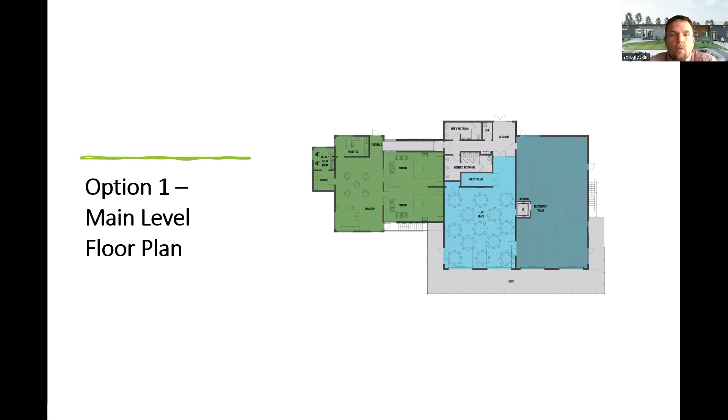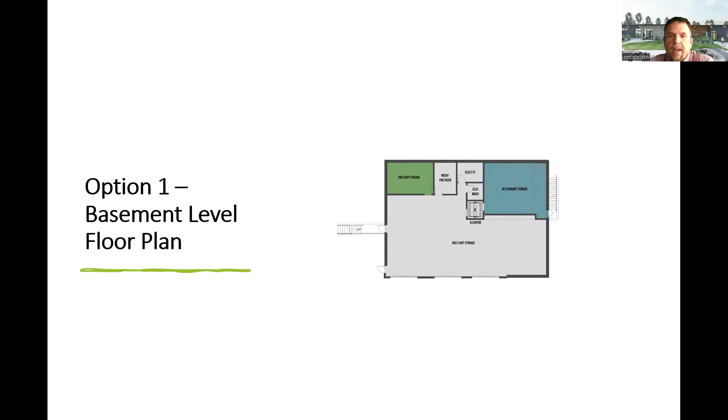We also have the deck area that we've talked about and really designed to. Next slide, Carly. Within the basement level, this was kind of that reuse of the existing footprint. So we have cart storage, pro shop storage, and there is some restaurant storage included as well. Then you have your back of house: mechanical, electrical, and fire riser room, kind of back of house spaces.

That need to be included in order for your building to operate. And then from an exterior perspective, we've really stayed true to the exterior renderings that you've seen previously, as far as having three different elements.

I'm not going to speak to the architectural nature of this project. Steve and Joey and Architects West have done a great job of doing that previously, and that's not my area of expertise, but I just wanted to highlight that we've tried to stay true to those core concepts that you've seen. So that was previously the front of the building.

And then here's two shots, one looking from the south, kind of looking southwest, and then southeast, to give you a flavor for that back area of the building itself.

So I guess the takeaway before I move on to option two is really, from an overall functionality and concept of what you've seen, we aligned that budget with the scope we've presented on previously over the last four months. We want to make sure we hear what you've previously talked to us about, which is the budget, and that we have a scope and project that still aligns with the budget we've been given.

There are some concessions that we've taken into account to realign and get back to the budget of $6,995,000. I wanted to highlight what those elements really would be. So what you see here is a reduced scope, impacts are in red. The first is really a function of operations for the golf.

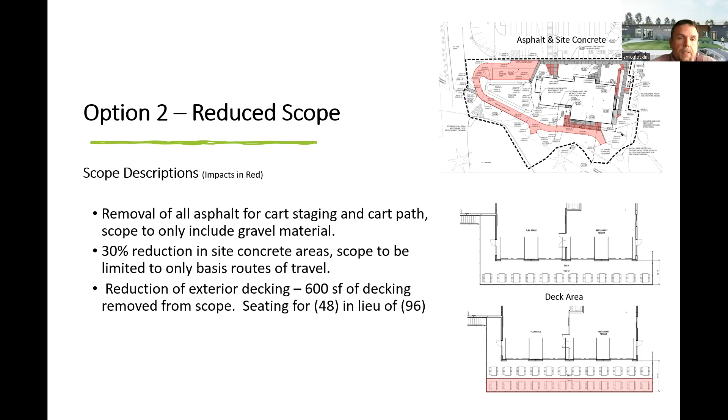On the interior of the building, there's some changes we would make. The first being the reduction in all casework areas, so we would have a very minimal allowance to include casework, mostly impacting the pro shop.

The areas in red give Chris only a break room area and a point of sale countertop, with auxiliary areas eliminated, as well as eliminating casework down in the cart storage area. There would be no casework other than a point of sale countertop, the countertops associated with the restrooms, which are required, and a break room top in his break area.

The other thing we would do and save for a later date is the separation of the pro shop from the sim bays. There's a vertical wall with a clear line of separation that includes the doors and windows. That would become one big open space, not separated, in order to decrease costs on the project.

At the exterior, there would be a reduction in the amount of exterior manufactured stone. We'd be very isolated in how much stone you see. The change would be a fiber cement exterior siding condition in most areas, with a minimal amount of that stone feature focused around the entry to the flex space. The other elements of the project would be fiber cement siding materials.

I really don't want to add any more to how much we're going to spend, but I do like the possibility of taking the 300,000 out of the golf operations, provided that that doesn't end up being something that comes back to bite us.

The amenities that you've presented to us, to me, gravel versus concrete being a lot of maintenance - I don't think any of us need a primer on that. It would be, and Lisa sort of handed off to you, but that could be an ADA issue in my opinion as well. Anybody who was going to be using that area, gravel versus concrete or asphalt, is just not even usable, let alone the increased maintenance.

Back to the building, while I don't really care a whole lot about the pro shop's trim boards or baseboards, can you speak a little more to the removal of the stone on the front? I'm assuming that's the parking lot side of the building. There's none on the sides. Just trying to understand where the 700 square feet would come from if that was the route we were going to go.

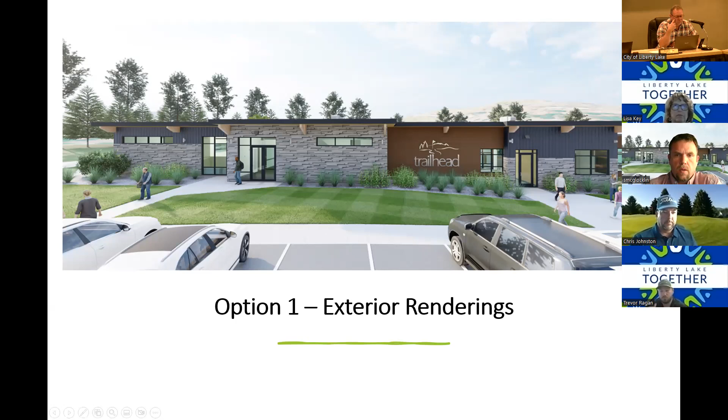Yeah, so the rendering we'd want, Carly, is with option 2. But to speak to the extent of it, really all you'd have at that point is what you're seeing in the lower right-hand corner, which is the entry into the flex space. On the backside, we could isolate a couple areas where we have some pillars coming off the deck to accent the material there, but really only 2 locations for that material, so that would be replaced.

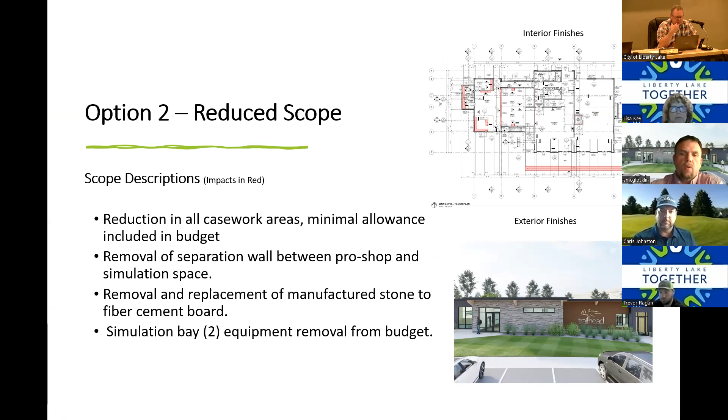So the previous was like a wainscot where it says 'trailhead' over on the far left. Correct, around there, and then the same occurs on the backside on the wainscot around the deck area. We would remove that and go to just a couple of vertical elements by the overhead coiling doors or sectional doors, just a couple here, nothing over on the side. Great, thank you. Yeah, and I would echo the 4%, just great.

Yeah, great. Councilmember Cargill. Thank you.

To Councilmember Foyers, I understand what you're saying about the 9 to 12 million we were talking about, but I want to remind everyone that we broke apart the driving range at that time, and we said let's not forget we still have the driving range. So if we add the driving range back in and all the other stuff that goes along with this, we're probably going to be in the range of 8 to 9 million right now. Again, we don't know what the driving range is going to be, and that's one of my concerns, because it could be a huge outstanding cost that we have no clue about at the moment.

Kyle, I just want to ask a few more questions about the golf fund balance. Where does the golf operations fund come from? So that comes from all of the revenue generated: greens fees, driving range fees, season passes, and pro shop merchandise. Those are your major revenue generators.

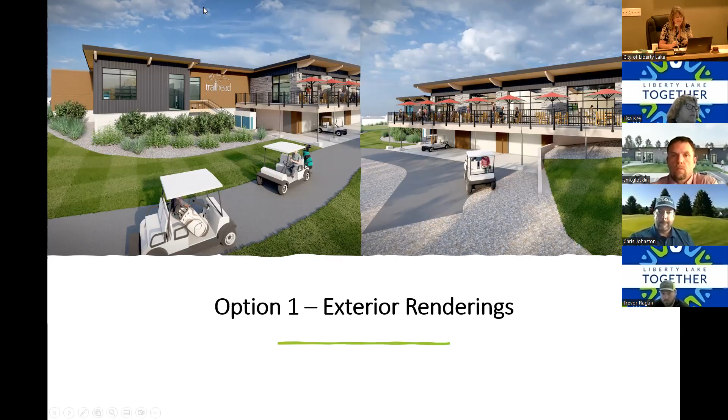Thank you. Any other comments? If not, we do have a section for more discussion during the workshop, and we've got the action item later in the meeting. So it's 6:46 - why don't we take a break until 7 o'clock and come back then. Thanks, team, we'll see you back for the action items.

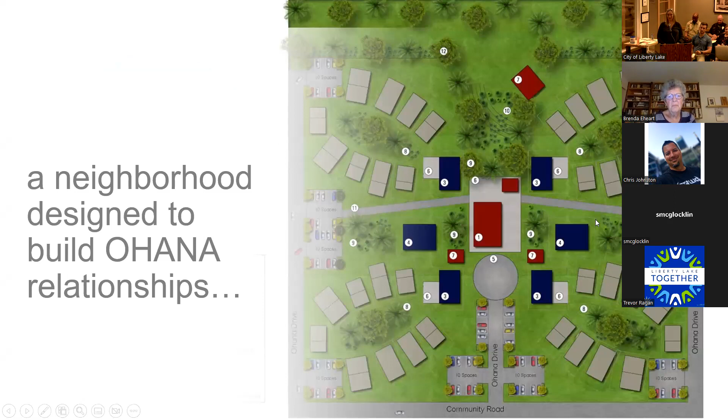So I know we're running out of time, but I just wanted to give you a visual of the concept we've been talking about here. The Ohana is a neighborhood conceived for a very specific purpose, as Deb mentioned, to support different people through the different life stages. It's very important to us that we follow a path of thoughtful and inclusive design for the homes in the neighborhood that follows that purpose.

While we haven't yet finalized our site location for this project, we've been thinking for many years about what this neighborhood might look like. We've been having community conversations with our Ohana community, both people who might live in this community and people interested in it, talking about what it might look like and how we might design homes and the site itself to accommodate the different needs of people who will be there.

Let me very briefly describe this concept. It's based on pocket neighborhoods, a concept coined by Ross Chapin, an architect here in Washington. The idea is that there are clusters of 7 to 8 homes, maybe up to 10. You see 4 clusters here. On this particular site plan, we would have about 50 homes in total.

Each cluster is designed so that the people who live in that small pocket neighborhood get to know each other really well as they walk on the paths to their front door, or work in the little community gardens in between the homes. Each cluster also embraces a home where adults with developmental disabilities might live—you see that in the center in those purple buildings. Each of the 4 clusters surrounds a common house, an extended living space where people can stop by for a cup of coffee and have conversations with their neighbors.

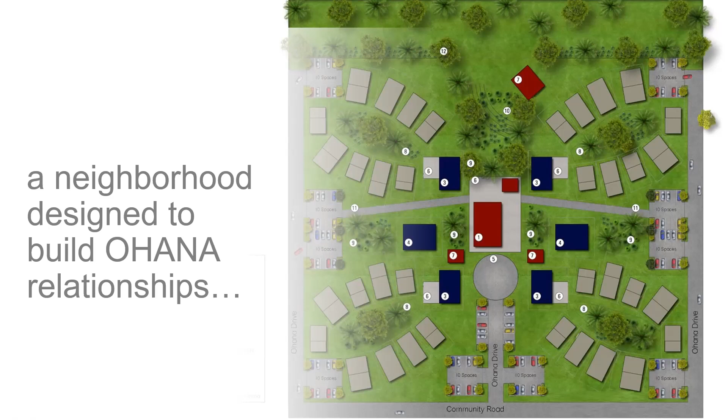The homes in Ohana will be single-family detached homes. We haven't yet designed them, so I'm showing just an example of what a home might look like in one of these clusters. The homes will be available for sale to anybody who wants to live in this community. We imagine a lot of the families of people living there with intellectual and developmental disabilities will be first on the list, along with seniors or retired people interested in living with this purpose we've defined.

It's very important to us that the outside of the homes look like any well-designed home, so they appeal to a range of buyers. They'll be very well-built, high quality. But if you look closely, you'll see even more careful attention paid to the design of these homes and the neighborhood as a whole as we move forward.

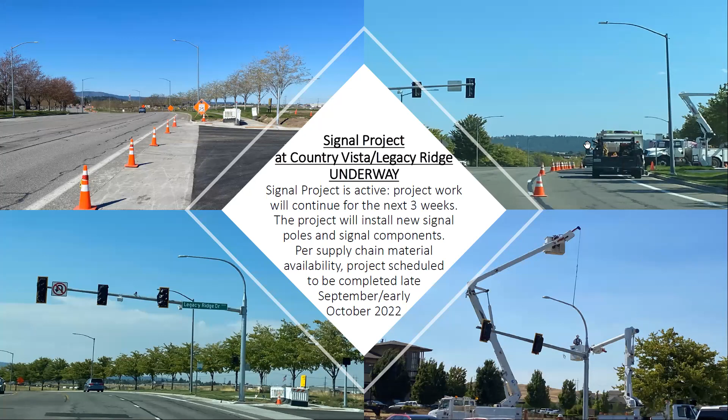The first project is the signal project at Country Vista Legacy Ridge. I received so many phone calls about this project, and now you see some photos of the work taking place. There are poles up right now, so we're moving on this job. It should be completed by early October 2022, so in just about a month or so.

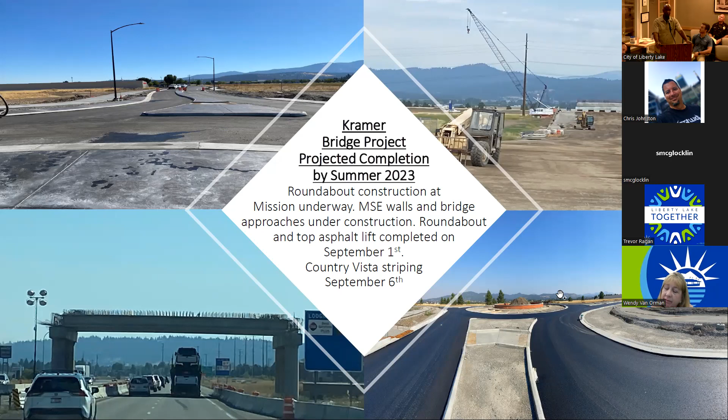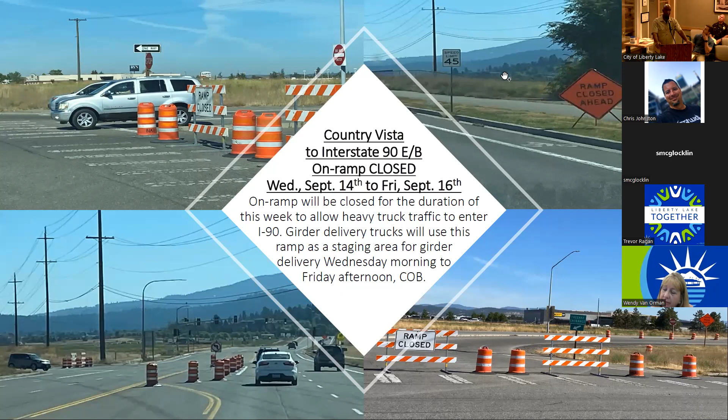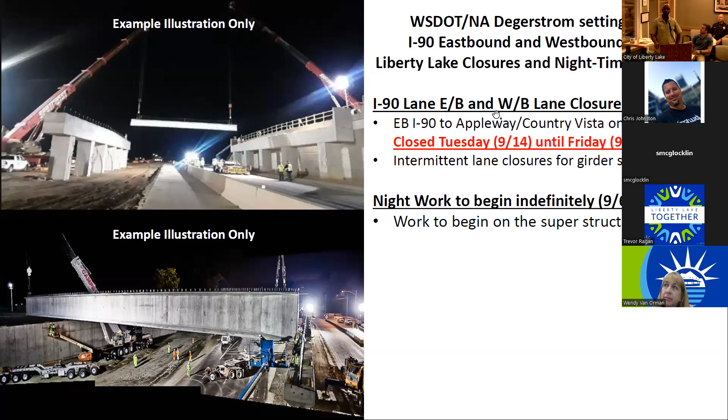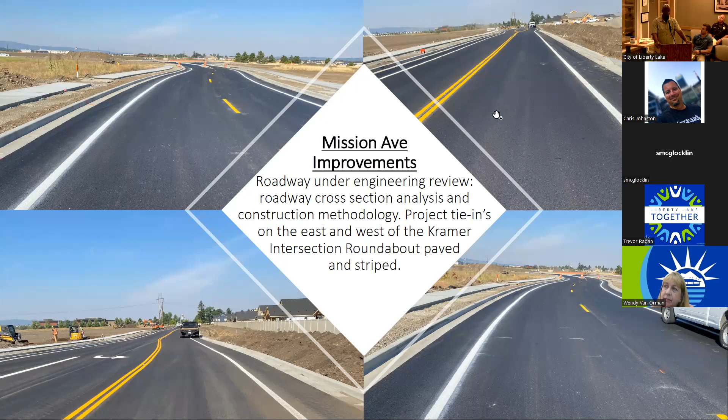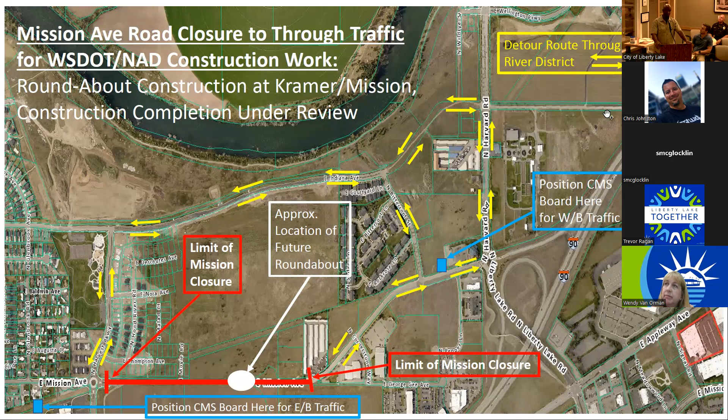This is, again, the detour route that we have going along from Harvard, then over to Indiana and to Harvest. As school is beginning, we're just asking people to please direct your children to use the detour. Please do not have your kids go through the construction zone. I want to thank Liberty Lake PD for patrolling that area.

We have residents who are actually driving through those areas right now, right down Mission. It is a closed roadway. We're asking you please not to do that because you might encounter construction equipment or construction stuff. So we just ask you to please stay off of that road until it's actually open, and one more time, please lead your kids to take the detour.

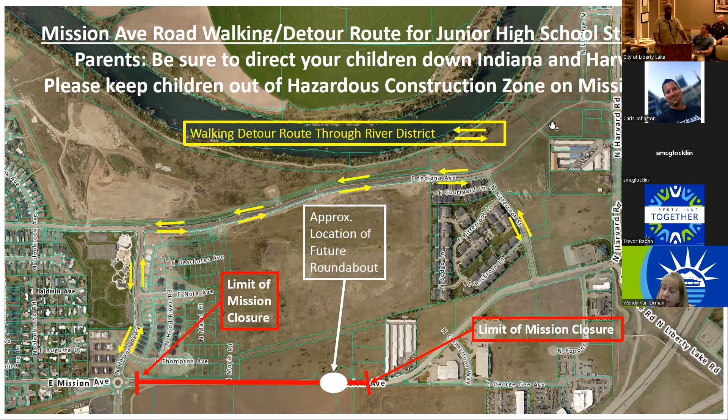This is the Kramer rehab project, and this is actually kind of a great end to this thing. We're coming up close to this actually being completed. The roadway has been paved for most of the road, about two-thirds, maybe three-quarters of it, are done. The section closest to Sprague, I think it's Legacy Springs, I think it is...

Trying to read that real fast. I realize that I'm 46 now, I can't read as far as I used to. This aging thing. So yeah, that road, that portion, the top right picture right there, it is still open right now.

Beginning today, they are doing a complete demo of that area going down to Sprague, which will take another 2 weeks or so. We're saying all the way up until September 21st, but we're trying to work diligently to get this portion of the roadway done. So please know, if you're coming out of Green Acres to take the roundabout over to Sprague and up to Appleway, residents living in Legacy Ridge can actually drive down Kramer all the way to Country Vista. So Legacy Ridge is pretty much open for traffic, and it's striped right now as well.

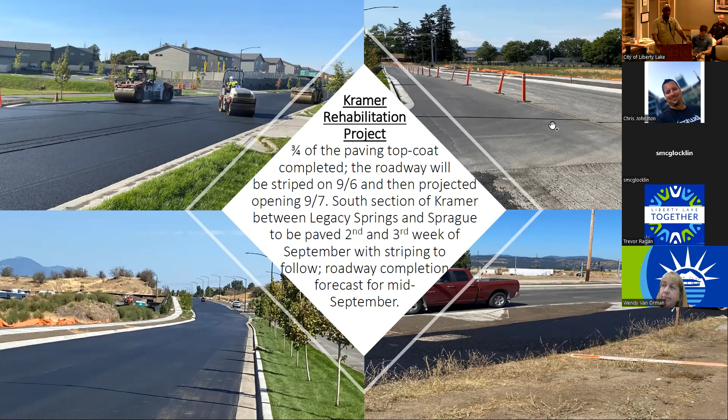The Kramer Parkway between Sprague and Legacy Springs - I forgot about this one. This is a 2-week hard closure, the same area I was just speaking about. You can see the photos here, this is what it looks like currently. We're again going through an engineering review to make sure it's rebuilt correctly and done appropriately. So just know, if you're coming out of Green Acres, this section of roadway will be closed for the next 2 weeks. That's our projected schedule. We are hoping and pushing this one through NA Degerstrom to get that done a little faster.

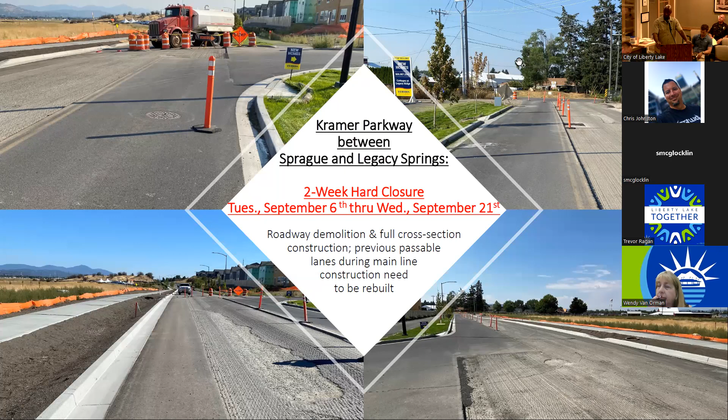Next slide please. You can see here, this is just an illustration of our layout showing the white area is Kramer, which is open. You can come off of Legacy Ridge onto Kramer and up to Country Vista and back and forth. That hard road closure is just there between Sprague and Legacy Springs.

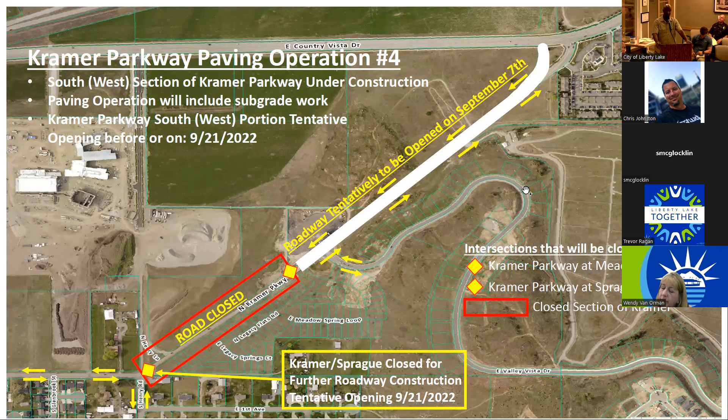We asked too, there is patrolling going on out there on Country Vista. That yellow area is a 25-mile-per-hour construction zone. Please obey the speed limit because I know some guys in blue right behind me are looking for individuals going over the speed limit. So please slow down in that area. We appreciate it. Go ahead.

Quick question while you're on that one, David. I know we've had some issues with people stealing those speed limit signs. In fact yesterday, when I was headed west on that road, there was no speed zone ahead construction sign. I didn't see any sign that said 25 until I got right up to the construction area.

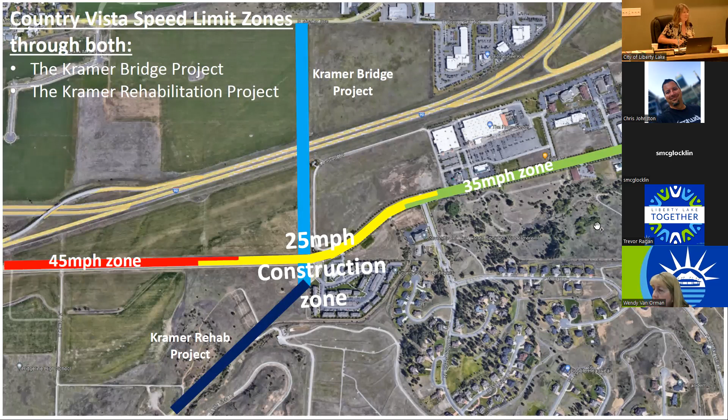Yeah, so I know we've been having some issues. We have a disappearing 25-mile-per-hour zone speed limit sign, and a lot of construction signs are actually disappearing. Our construction crew out there is taking care of that as much as possible. My project manager, Phil Messick, and myself are really trying to stay on top of that, but it is a continuing issue. Our crew, Derek Kamisek, has actually put out our own Liberty Lake speed limit signs as well. We're trying to keep up with that. Well, granted, when I went by it was a holiday, so nobody was probably even looking at it. Thanks, okay next slide please.

One more time, construction zones are closed, so please, if you're driving through Mission, please stop. And then on Country Vista, obey the signs as well. I came here in case you all had any questions involving the closure at Mission. It will not be opened for maybe the next, we're going through a couple meetings, we're projecting that may not be open until potentially October. And then Kramer, like I said before, we're projecting that to be open on the 21st of September. Again, we're looking ahead to try to get that done quickly. But if you have questions about that, because I know citizens will ask you guys directly about those things, I'm here for that in case.

Any other questions? Go ahead. Yeah. Oh yeah, I'm sorry, I went through that too fast. It should be done end of summer 2023. So we've gone from spring to summer now.

Yeah, there was, I told you guys before, we had some MSE wall delivery and production getting here that had nothing to do with the contractor. It was all a production issue from it being manufactured. So they've been working diligently. They're actually working on bridge portions right now to try to get those things done quickly as the components are coming in, but they are coming in now, so it's kind of a steady trickle. Okay, yeah, I was driving and saw some on the side of the road on the north side. Yeah.

On the Mission, north side, it's undergoing the engineering review.

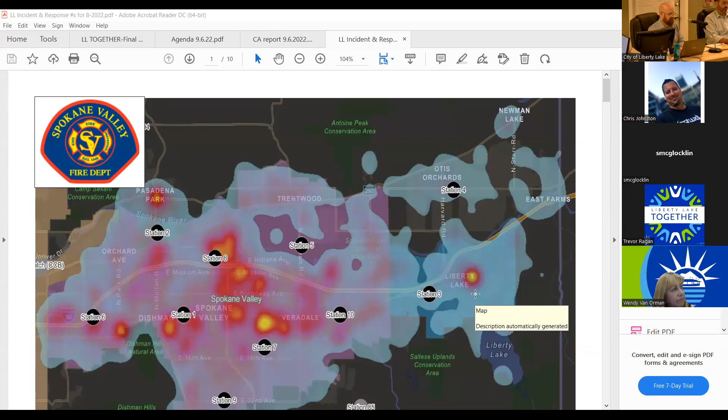For the month of August, we had 118 911 dispatches. Of those 118, they garnered 87 responses. Sometimes that number isn't the same, only because of cancellations on calls.

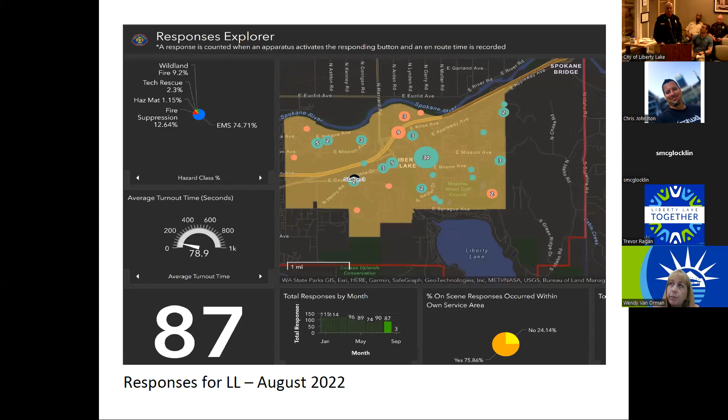The top 5 calls were sick calls, fire alarm activations, falls, chest pain, motor vehicle accidents, and vehicle fires.

For the year, we've had 879 dispatches for 911. You can see on the map the bubbles represent the highest amount of calls. The red bubbles are the highest amount of fire calls. The number 1 caller is Guardian.

Those 879 dispatches garnered 789 responses.

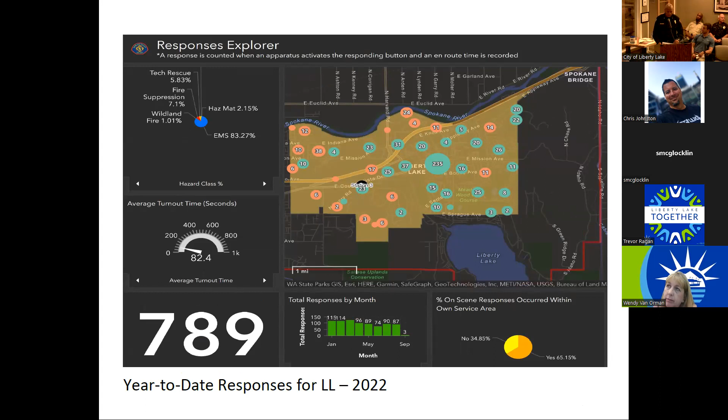Our top 5 calls: number 1 is still falls, followed by sick calls, fire alarm activations specifically, motor vehicle accidents, and trouble breathing.

Significant events this last month: burn restrictions are still in place. Things are just now starting to ramp up. We saw this happening because of the amount of rainfall we were getting. This is not new, but obviously a huge concern, so we're out and about making sure we're on it as soon as it happens.

Our Recruit Academy graduated on August 31st. We had 10 recruits who did a great job, so we couldn't be more pleased with them. They're already out in the stations now.

Our fall open house will be Saturday, October 1st at 10 a.m. This hasn't occurred the last couple of years because of COVID, so it's back. I hope to see you all there with your families, we're going to make it a huge event.

Deputy Chief Greg Rogers was recently sworn in as chair for the International Association of Fire Chiefs Fire and Life Safety section, which is a big deal since it covers the whole United States. Also, from August 22nd to 25th, we hosted a regional ladder truck training at our training tower with Kootenai County and Fire District number 9.